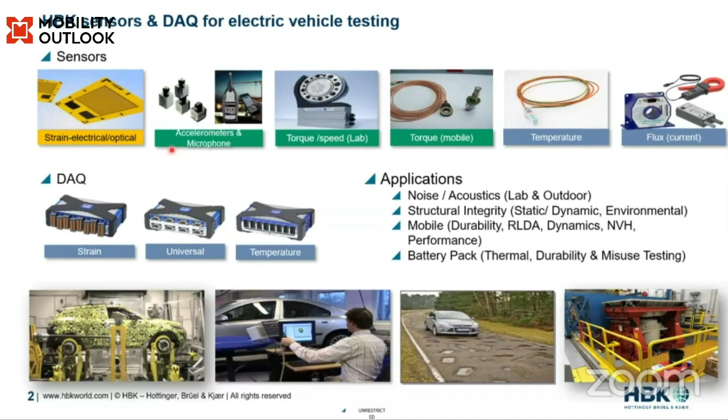Moving to the next slide. So we are taking the data to do further analysis. For that we are using the HBK sensor and data acquisition system, and after that we take that input and give it to nCode. So nCode is the software side of HBK.

It is made of two really powerful pieces of engineering software. The first one is nCode and the second is ReliaSoft. nCode is for durability and processing measured data, and ReliaSoft is for reliability analysis. Right now we are going to focus on the nCode software brand only, so we can discuss the need for reliability analysis in electrification another time.

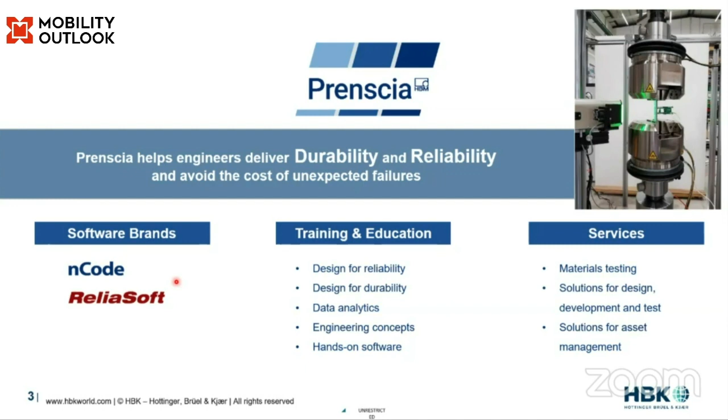So the first question that comes to mind when we buy an electric vehicle: there are two challenges in electric vehicles. How can we reduce the risk of structural failure? And second, how can we ensure that performance, range, and efficiency expectations are being met?

We know everyone is moving to electric vehicles due to petrol price hikes. The average price in India is almost 105 rupees, and the government is also giving tax concessions and some discounts on electric vehicles. But in India, no one believes easily, and no one is going to buy electric vehicles after watching reviews and videos only. They simply believe in word of mouth publicity, meaning discussing with existing customers.

And in that, the first question that comes to mind is 'kitna saal chalegi' - meaning how many years it will last long, right? So will the battery tray crack, or what if the electric vehicle starts needing too much maintenance? So these things all come under durability. And second is the performance.

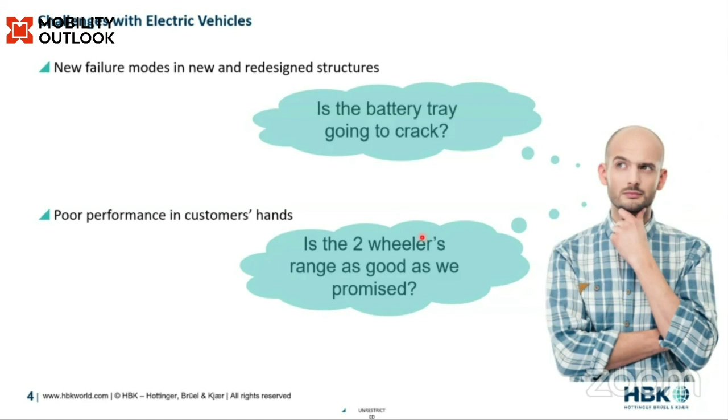So the second thing is kitna degi, meaning what will be the mileage. Is the two-wheeler range as good as promised? Suppose one says our mileage is 150 km, and I plan a trip from Pune to Mumbai, but I get stuck in between at Lonavala due to bad mileage, not the promised mileage. So currently these two issues mainly happen with electric vehicles, and both durability and performance improvement is possible in nCode.

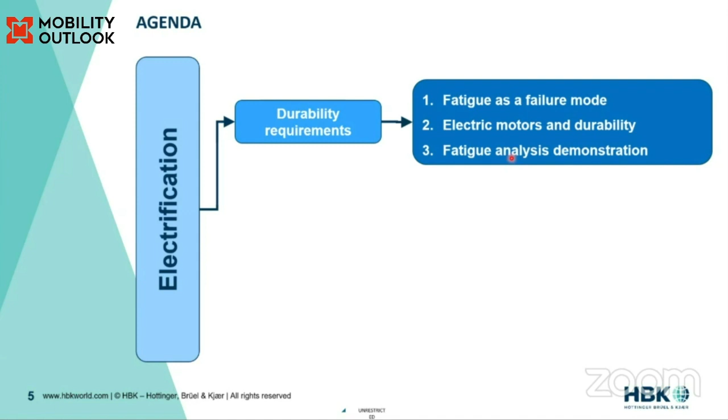So how is it possible, we'll see. First we'll focus on durability requirement. In that we'll cover fatigue as a failure mode, what is fatigue, and electric motor durability, and for that we'll see one small demo. Next agenda we'll see how to improve motor efficiency and power measurement and its analysis, and a demo for that.

So how do we know how many years it will last long? How do we know it performs as intended? It's extremely expensive to watch prototypes fail in the test lab. So we don't want to commit time and cost building prototypes until we are confident that our design will meet the requirements. We need to be able to predict and quantify performance early, before the development cycle.

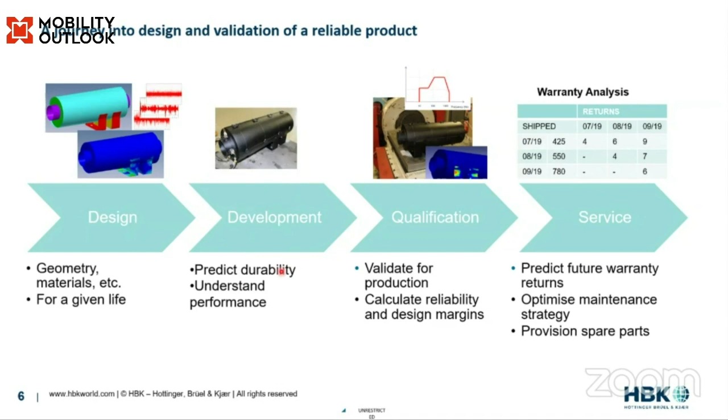So here we'll see the prediction of durability. Before going to qualification, shaker table, and test lab, we can say, okay, this is the life, and no need to go for the prototype if it is already failing, right? So how is it possible, we'll see. So we'll focus on durability now.

So this is fatigue. Fatigue is a failure mode that can happen over time, and stress cycles cause cumulative damage that ultimately can lead to structural failure and a disappointed customer again. So we need to design this again to ensure our electric vehicle is durable and will last long. In automobiles, 70 to 80% of parts fail due to damage occurred by fatigue. In simple words, fatigue is...

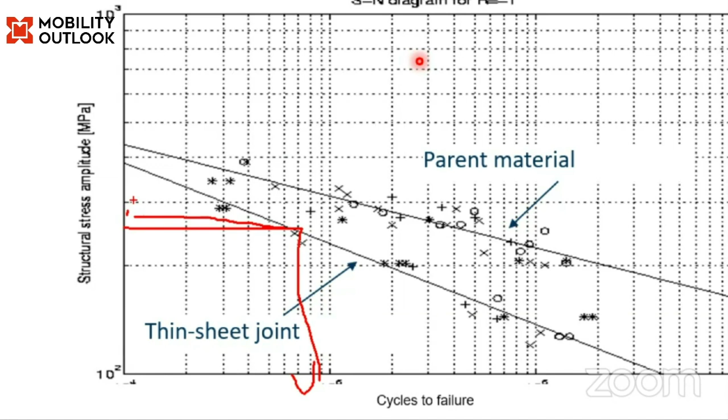Suppose there is a stress value coming from the FEM model. For that stress we can calculate the number of cycles. Now suppose we have 2 lakh kilometers and we want that vehicle to survive 2 lakh kilometers. For that cycle and for that life, we can reversely count what will be the stress value. So vice versa, we can calculate the damage and life for that particular product.

And to generate those curves, we have a test lab, a material testing lab in UK. There we can generate new curves also, SN curve, EN curve, as per your requirement. And already we have a number and variety of material databases in nCode, so for calculation we can use that.

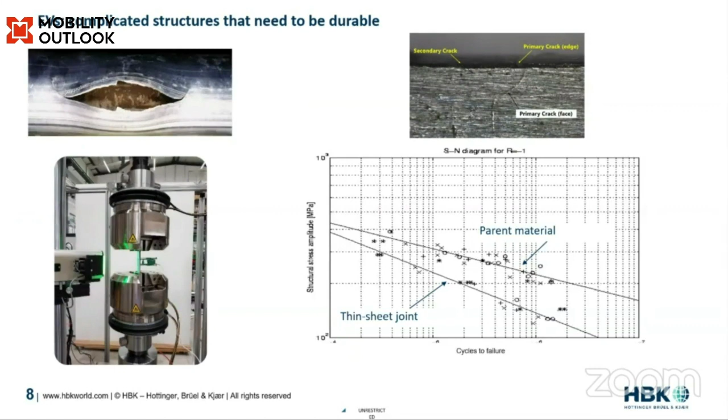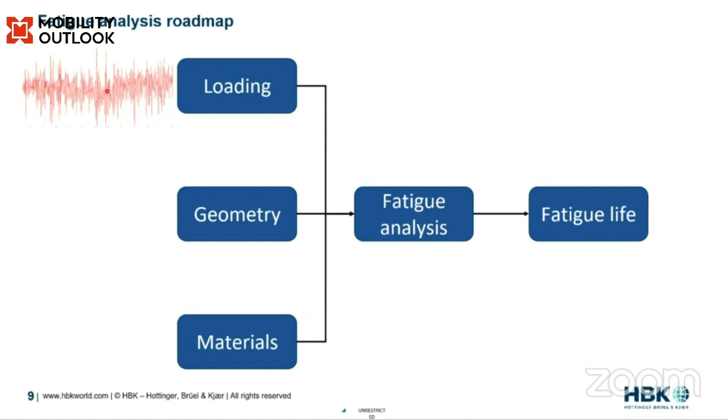So now we'll see how to calculate the life of that product. Here is the 5-box trick for fatigue analysis. This is the squiggly line - suppose your electric vehicle is moving, meaning we are creating some forces on that vehicle, and that force, that vibration, we can measure. This signal is measured by the HBK device. This is the loading, and this is the FEM model having stresses - this is the geometry, and third is the material. By giving these 3 input parameters in nCode, we are calculating the fatigue life.

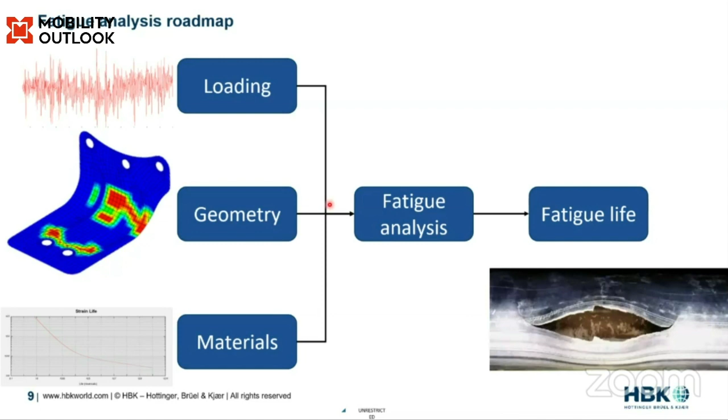So for this specific material, we have the strain and stress curves. Now we'll see how to calculate the fatigue. Now here is a small demo for that.

So kitna saal - now if you see here, kitna saal chalegi, meaning how many years it will last long. Now here are the battery tray holders. We have to check the damage and how many years it will last long. Here is the battery and these are the supporting brackets. Now we'll see one small demo for that, to calculate the life.

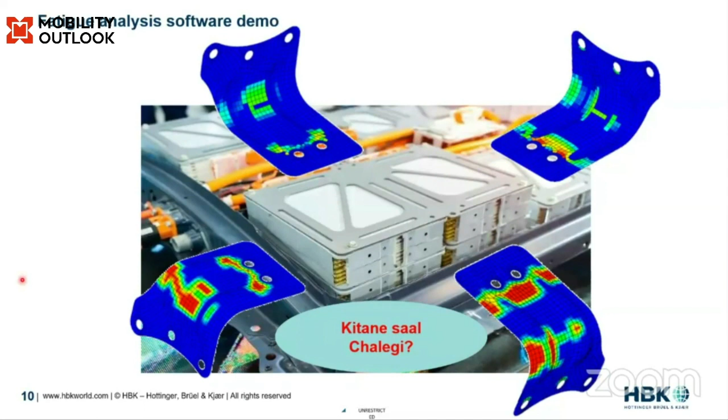Okay, so this is the user interface of the nCode. On the left side, you can see this is the GlyphWorks. It is useful for test data processing and design life, to calculate the damage and life. And here in the working window, we can import the input files.

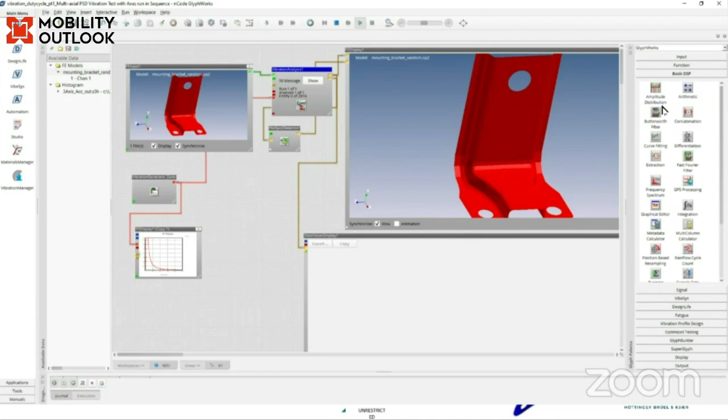On the right side, you can see the number of glyphs. A glyph is an Egyptian word, and each glyph is made to perform a specific operation and task. By connecting one glyph to another, we can create a flow as per our requirement and calculate the life. Now the run is completed, now we'll see.

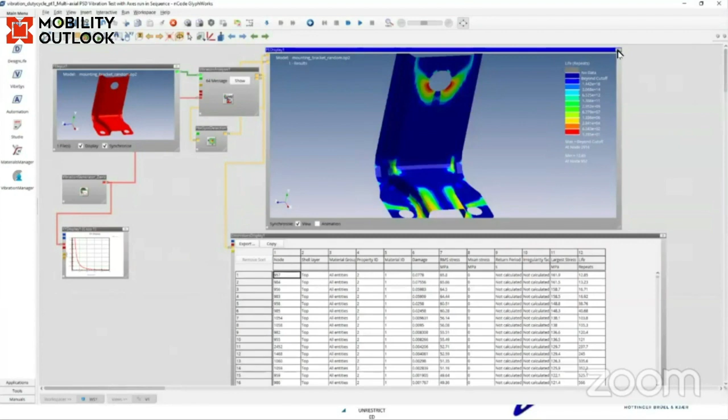Now here is the battery supporting bracket. I have made some changes in hours and years. Here you can see a hotspot is coming. At this node, the battery is failing. It's saying the minimum value is 12.8 hours, so we can say that the battery tray will fail after 13 hours, right?

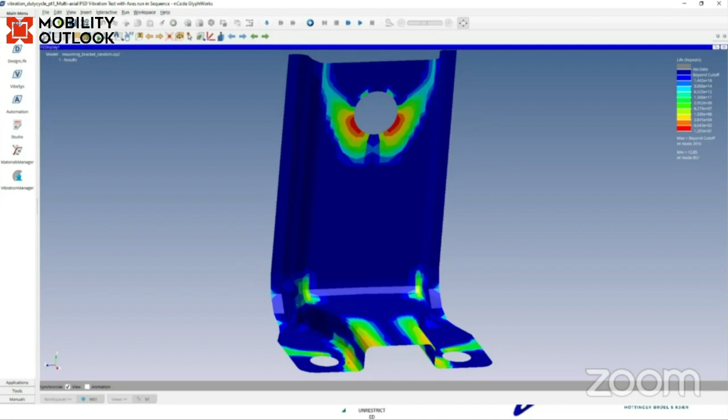So that's when we apply that much load. From here we can redesign it such that it will not fail. We don't have to go with the shaker profile or test lab if the virtual product is already failing. For that we can save money and time, and redesign it. So for durability purposes, this is very useful. This is the demo side.

Now we'll move to the next slide. This is for a depth review, meaning depth details of at what node, what will be the life, and how many repeats it will survive. Now we'll move to the next slide.

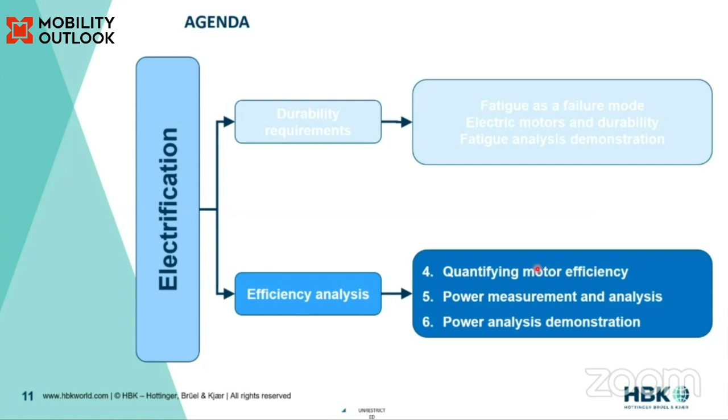So we need to maximize the efficiency, but converting power types leads to inefficiency. We can use a wide variety of motor control strategies, but which gives the best efficiency? We need to do 3 things to answer this: first, measure the power flow - DC current, voltage, and 3-phase AC output from the inverter - and finally mechanical speed and torque from the motor. From that we can calculate the efficiency throughout to quantify the performance.

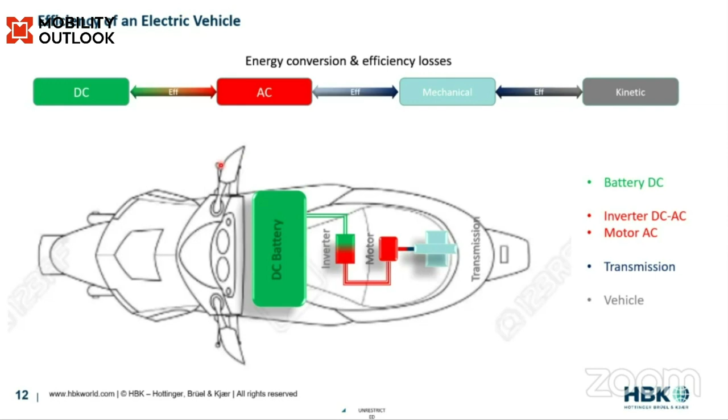So we can begin with improvement in the system for range and performance. We'll see how it's possible. For that, nCode electric glyphs is very useful. I will move to the next slide.

To measure the input and output electric current and voltage, we are using an electric e-drive system here. We are using HBK's e-drive system for electrical power testing. Tomorrow at 12:30 p.m. you can see the Mitchell Mark presentation for these details, for a depth review.

So here you can see the batteries - from there we can measure the DC current and voltage. In the inverter we are measuring the 3-phase AC current and voltage, and from the motor we can measure the torque and speed. Using our HBK hardware we can acquire that data, and nCode sits here.

By taking that data we are doing the power analysis - what is the efficiency for a specific inverter and motor - and accordingly we can improve that design. For the e-drive, it's very simple: we can record the signal at 2 million samples per second. This is the accuracy range, and simple data collection of electromechanical signals is also possible.

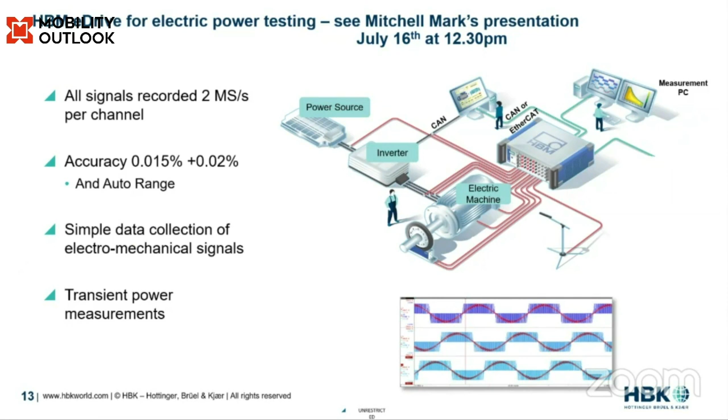Now we'll see the efficiency of an electric vehicle. How to calculate that? We simply know how to calculate power by multiplying current and voltage. But here the inverter plays a very important role. And here is the mechanical power - we can calculate that using torque into speed, right?

So DC power is easy to calculate, as is mechanical power. But AC power calculation can be hard because of the phase difference between voltage and current that causes losses. Inductors and capacitors introduce phase lag or lead, and periodically energy flow is reversed. So we need to think about active and reactive power, and we'll see what that is. Reactive power is introduced back into the system and causes losses - that's the losses. Active power is the useful power that only flows from source to load.

So we can quantify that and understand all this using the HBK tool. For easy understanding, we'll see.

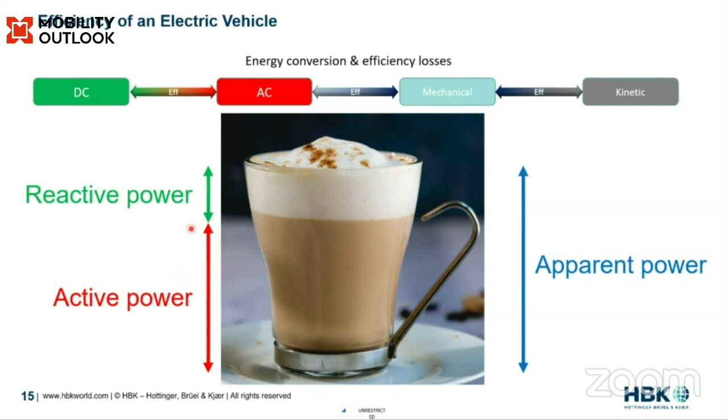For easy understanding, we'll see what is apparent power, active power and reactive power using a drink analogy. This is the apparent power, or what is coming from the DC battery, but we can consume only this much. From this coffee we can consume active power this much only, and the rest is the foam - this is the reactive power. In simple words, we can't increase the reactive into active power. So when we want to increase the efficiency of the battery, we reduce the reactive power by measuring the input output from the inverter and motor, and we calculate where our battery or motor efficiency sits. So by reducing the reactive power, we are increasing the active power - this is the efficiency for the battery and motors.

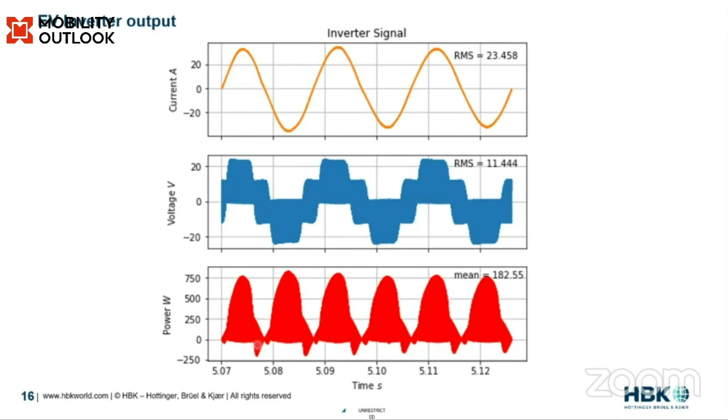In FFT, we can see the low frequency fundamental control frequency and high frequency switching harmonics from the digital inverter. Our harmonics are much larger in voltage and current, and this high frequency makes calculation more difficult. But that can be taken care of by nCode using the electric power analysis glyph.

Now, if you see here, this is the active power - the mean of voltage and current, and apparent power is the RMS of the voltage and current. Reactive power is calculated using this formula. This is the power factor.

If we assume a pure sinusoidal waveform for voltage and current, the apparent power calculation is wrong because it ignores the broad frequency content. Actually, when we measure real data, we don't see a pure sinusoidal waveform, so the calculated reactive power turns out really high. But again, for that, we use the electric power analysis glyph here.

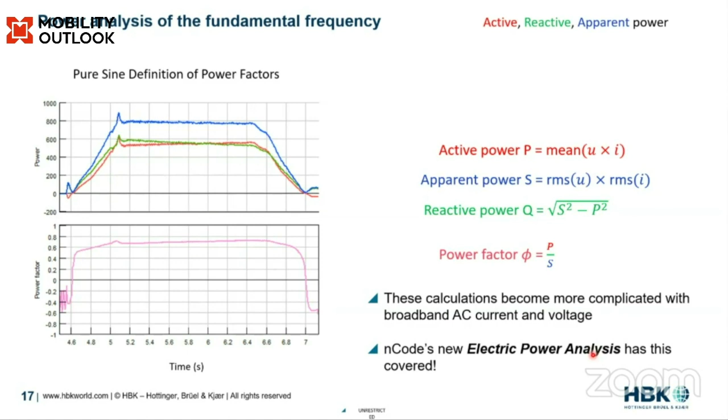We recently launched this, and in that we can find the performance and efficiency. Kitna degi means how many mileage one electric vehicle can give. So to improve the performance of the inverter, we'll see one small demo.

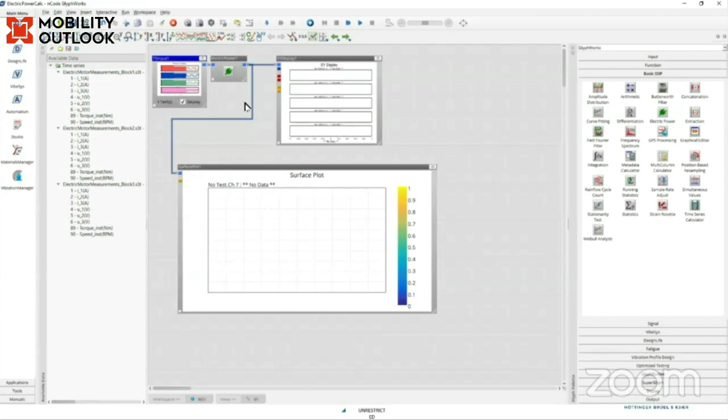Here is the input data. Now you can see we are having 3 events. In that we have taken 3 input current channels, 3 voltage channels, and 2 output channels coming from the motor. So to create a duty cycle, we dragged all 3 events and combined them here - you can see the signals here. Now to calculate the mechanical power, efficiency, power factor, we are using the electric power glyph here.

Now I am running this flow. You can see here, for this specific RPM and this specific torque, this is the efficiency. The yellow color you can see is the maximum efficiency. This data is blank because we have taken only 3 events.

When we have a number of events or data available, we can see the full graph here. So from here we can say, okay, what is the old motor and what is the efficiency for that? Now we have made some changes to the new motor, and the efficiency is good now. So for that we can create a number of strategies.

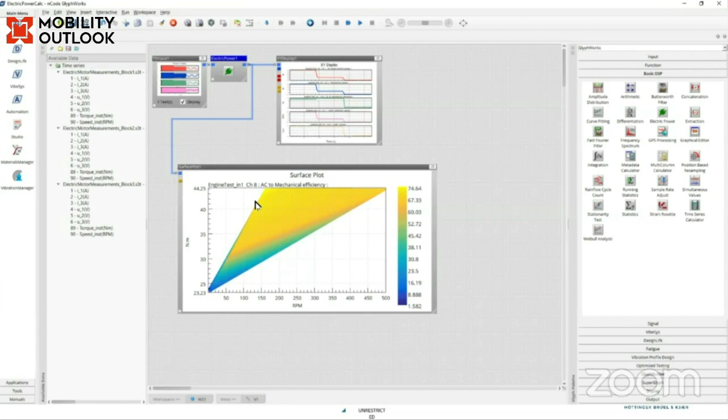Similarly, we can calculate the efficiency of the inverter also, and efficiency of the battery also. For that we simply require the current and voltage. So this is for the demo side.

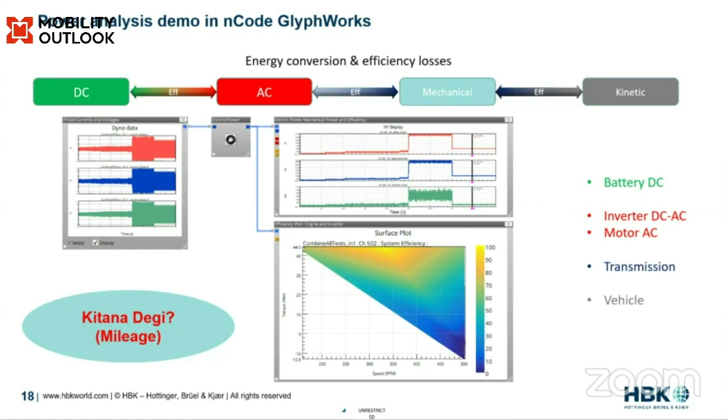Yes, this is the conclusion. So we have spoken today about the challenges in designing electric vehicles. First is whether it will be durable to last long without structural failure, and whether it will meet the customer's range and requirements. nCode software can help you with both these requirements. So we have achieved the two targets - kitna degi, the performance and durability.

So here is the last slide. Under the HBK, almost everything is possible. We are in this field for almost more than 40 years. Over the period, we evolved to give better performance and quality solutions. I'm not saying I am an expert, but definitely we are. So the only question remaining is you have to just come up with the question and the answer will be there.

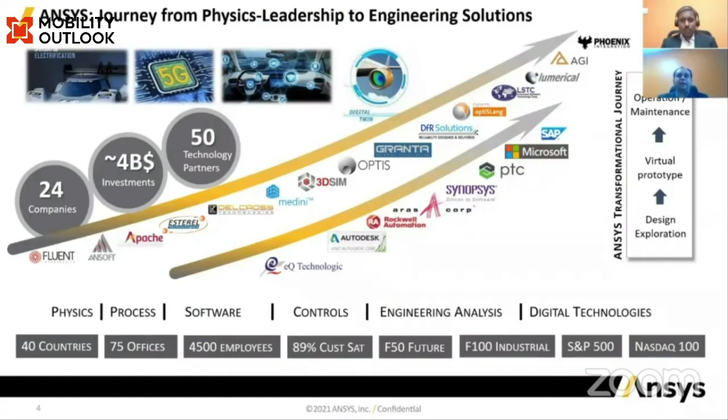So that's the ANSYS journey, and along with that, making sure the customers are able to visualize their product, how virtually it will perform in real life. We are also partnering with many of the OEMs like PTC, SAP, and so on. So ANSYS, I would say, is more of an engineering solution provider than just a point solution provider.

And next few slides, let's talk about switching to EV. We all know in EV, the pillars for EVs are the battery, the traction motors, the power electronics, and the system and software development. And in this, simulation has been used, I would say, for more than a decade.

ANSYS itself has a history of being in the EV simulation field for more than a decade. I mean, I would say in the early 2000s also, people were designing EV motors using ANSYS.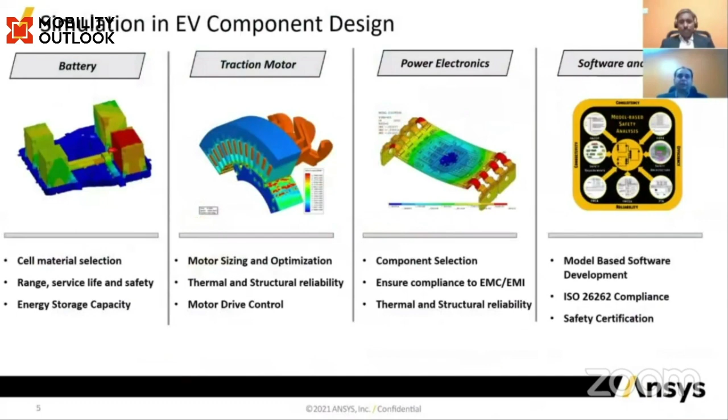Now, we'll be talking about all these building pillars, but the most interesting part we wanted to highlight in this presentation is the development V-cycle, which we normally see. On the right-hand side, once you have finalized a component, you would like to make sure this component, while testing, performs verification and validation using MIL, HIL, and SIL. And then take it to a system level with similar MIL, HIL, and SIL.

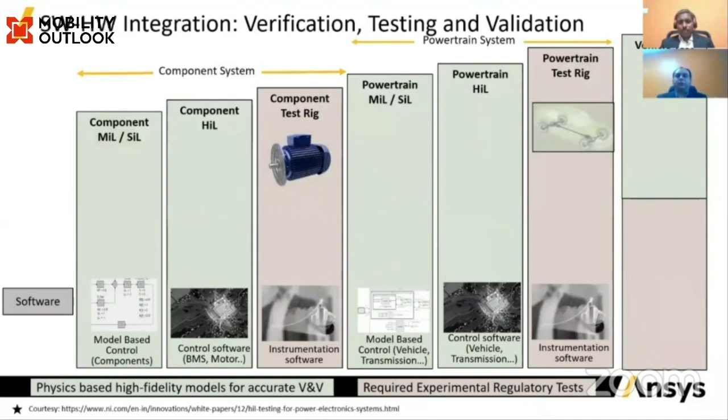Here, ideally, you do this using physical prototypes. And what we have also been seeing is that the hardware and software teams are isolated from one another. So if you're looking for software validation also, let's say MIL, SIL, HIL kind of thing, you either go with a physical prototype or you go with a low fidelity model to validate your software.

A similar thing happens on the hardware side also. Here also, either you go with a physical prototype or you go with low fidelity models.

So that's where ANSYS proposes a solution where, instead of going with low fidelity models, you can start using high fidelity models. These high fidelity models come from your simulations. So you don't have to do an extra step. All you have to do is use the simulation for designing your components.

And once the component design is done, you can export that high fidelity model, either in the form of ROM or FMU or so on. And then that can be used in conjunction with your software for SIL, or using it for MIL, HIL kind of thing. So that's on the component level, but each of these FMUs or ROMs which are coming from the simulation can also be integrated into your system level simulations.

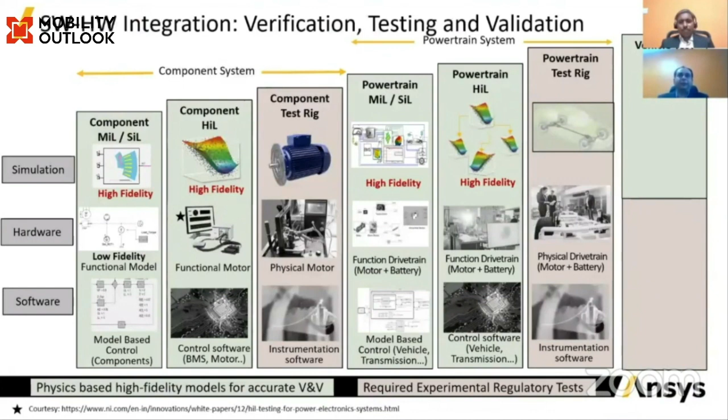And that's what you can see here for the powertrain MIL, HIL, SIL. What we are showing here is that you can use these high fidelity models for validating your system level things, and also for the vehicle level test. Instead of doing physical prototypes and doing your vehicle level test or road test, you can go ahead and also perform that virtually, so that you can reduce the number of physical prototypes and tests which you perform.

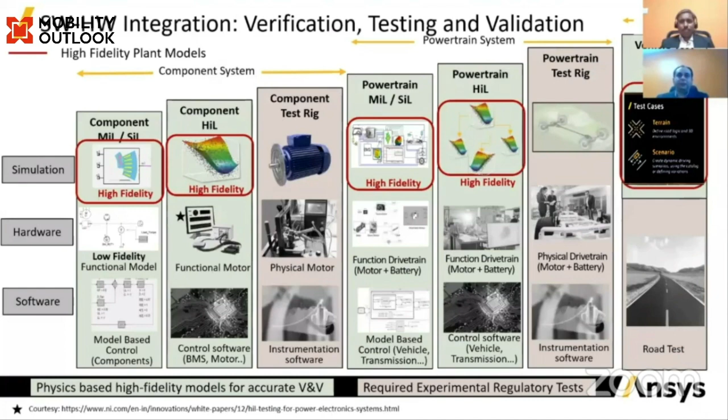You can accelerate your physical prototypes, and so on, and get better insight. So that's one thing. The second thing is virtual vehicle drive validation. Here again, instead of doing physical drive validation, where you may have n number of drive cycles and different test scenarios to be performed, can this even be done virtually? So this is something we'll be seeing in the next couple of slides. So let's get to our first topic, which is on the battery subsystem validation.

This is something we do day in, day out, where you perform a CAE analysis. You start with the electrode level analysis, a particle level analysis, and visualize how your lithium ion is going to be depleted. This is done by chemical engineers, then taken to thermal and structural reliability analysis by the thermal engineer, making sure temperatures are within limit, there's no thermal or mechanical abuse, and no fire, or if there is a fire, how you can mitigate that. Then it's taken further to the electrical engineer, making sure there are no EMI/EMC issues in the system, and finally once your battery is designed, it needs a BMS, making sure it keeps monitoring data like temperature, voltage, current, and so on.

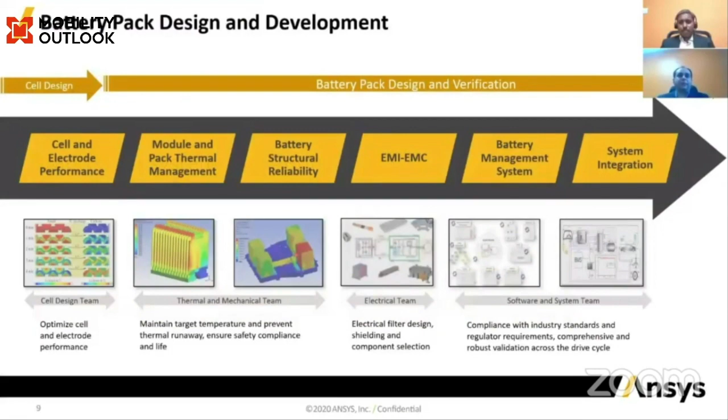While it's measuring, it's also taking into account some algorithm, some logic. Let's say if the temperatures are high, increase the flow rate. If its SOC is 0.9, reduce the charging, and so on. So all those logics are going behind your BMS part. This is something where Ansys is doing, and it helps.

Whereas compared to thermal models or CFD models, which take a couple of hours for a given drive cycle, you're converting your heavy 3D models to lightweight ROMs, and it's as accurate as your CFD models because it's derived from them. Now, instead of using a low fidelity model for your BMS validation, you can use this high fidelity model, and it's already available. With this step, you're bridging the gap between a simulation engineer and a CAE or hardware engineer. Now the software engineer can go back, fine tune his parameters, like the flow rate, or change the charging and discharging algorithms, because he now has more confidence in his design compared to using a low fidelity model.

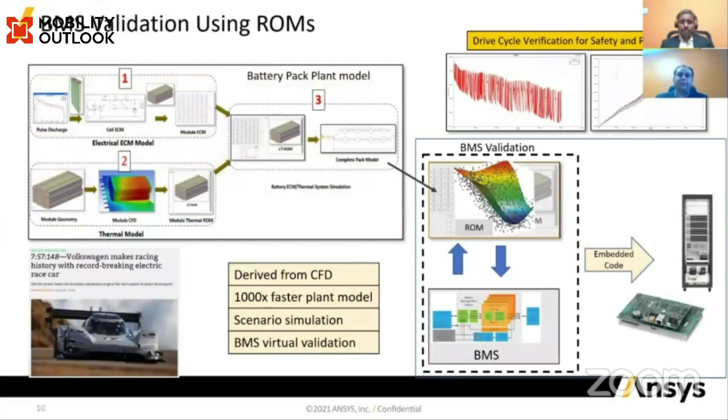So with this, I will hand it over to my colleague, Tushar Sambharan, who will be talking more on the motor subsystem validation, AI, ML, vehicle drive validations, and so on. Thank you, Ankit, for the details provided, setting up the context and covering the battery part.

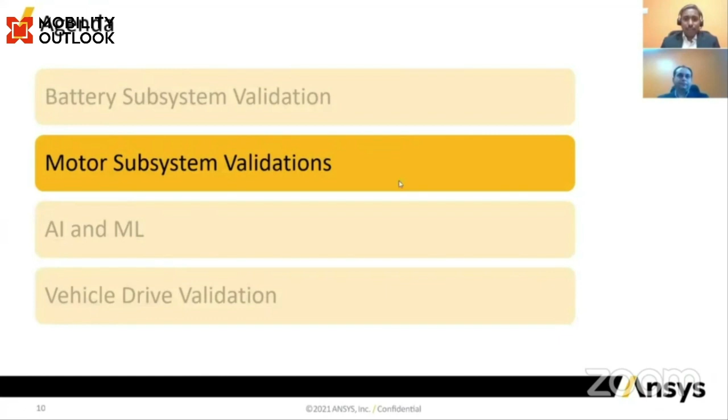Now, coming to the motor, it's a very important part of the overall electric drivetrain, basically the engine replacement. You need to make sure whatever motor subsystem you design is efficient, not only in terms of performance, but efficient in terms of operation as well. That's very important for validation, to make sure that whatever requirements you lay down for motor performance and overall operation are getting met. That's what we'll talk about in the next few slides, how simulation helps achieve those goals of motor validation, both from performance and drivability.

If you typically look at the motor design workflow itself, the motor is a component whose whole design life cycle can be maintained in a virtual environment with very high confidence. There are many practices in the industry where virtual validations or virtual design environments for motors have been able to cut down their overall design cycle. Typically, when designing a motor, you start with specifications like torque demand, speed demand, power demand, and so on, and then you have constraints like sizing constraint, current constraint, thermal constraint, so on and so forth.

Now you take these requirements and constraints and you start by putting together a design, typically starting with a concept level design. You use something much more user friendly and faster to do a concept level sizing of the motor. This includes electromagnetic sizing, coming up with the overall design like slots, and then thermal sizing where you decide what kind of cooling system you need, how the heat exchanger should look, and so forth.

Once you do the sizing, you validate that across the full torque speed envelope, because it's a traction motor and it's supposed to operate across the envelope. Then you do a lot of optimization at this stage itself, because you are in the early stage of the design. You need to make sure everything is frozen and you don't leave too much for the later stage. That's what front loading is in a sense, right? So you optimize and make sure you come up with the right design in the initial stage.

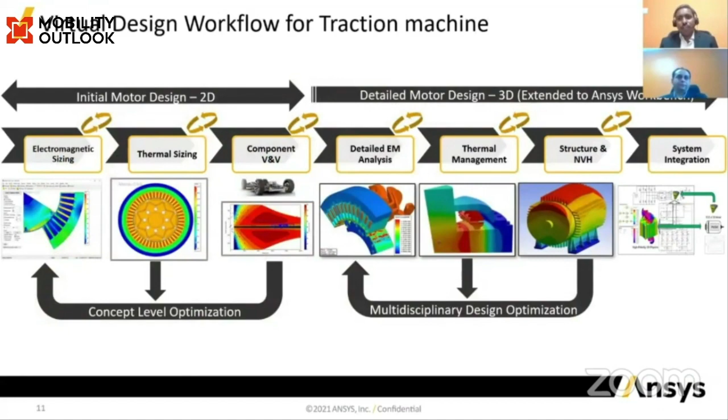For example, the motor is not alone, right? It has to work with your power electronics, it has to work with the motor controller. So the question is, how do I make sure whatever motor I've designed is controllable? And how do I ensure whatever controller I've designed is working correctly with the motor I've designed? Because they both need to meet together in a synchronous way. That's where virtual validation for the motor subsystem comes into picture, where we talk about generating a high fidelity model from your simulation, from your FE data, which you're generating through your design process, and create a high fidelity representation of that motor model and push it for your motor controller validation.

Now typically, if you look at the industry, many people still do validations using a low fidelity abstract model with constant parameters, which may be okay for an industrial motor. But if you look at an electric vehicle, the operation envelope is so huge that the characteristics of the motor significantly vary. So when you compare a controller working with the motor with constant parameters versus the high fidelity model, you'll see significant deviation in overall performance. The response time, the overshoots, the delay - those parameters are significantly different compared to what you realize in real life when you use a library based model.

That pushes the need for having a high fidelity representation, so that whatever controller you tune needs very little adjustment when it goes into the physical product. So you don't have to do too many iterations back and forth from the test bench to your lab to your design environment, and you're able to sign off with much less effort.

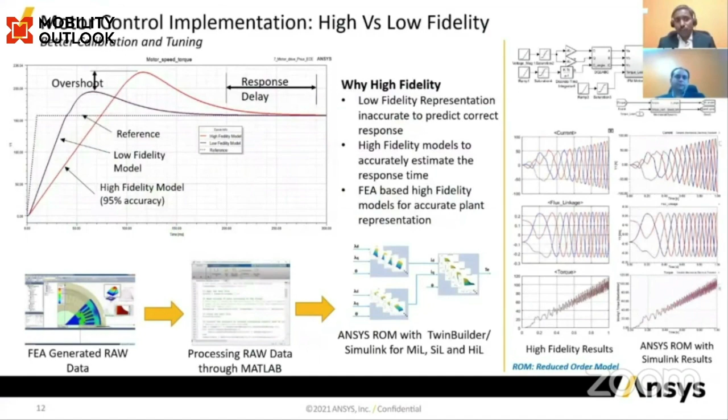Here we have shown the example using MATLAB Simulink, but it could be any other simulation environment where you may be modeling or simulating the controls. So there's a lot of questions on the controller level as well.

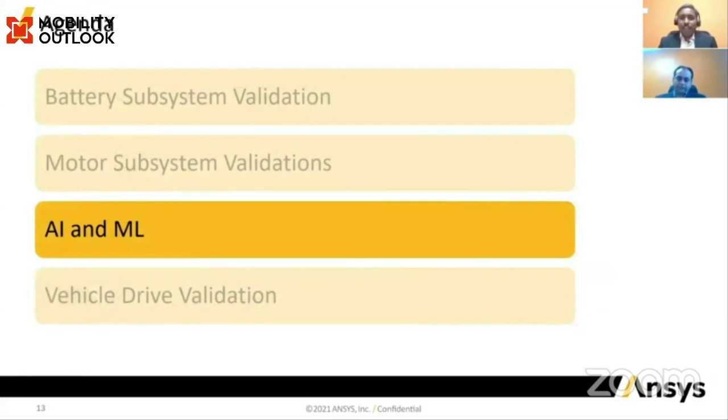Coming to AI and ML, I think this is going to be a game changer going forward, because the techniques developed through machine learning are going to come together with simulation and be very powerful in making sure that real life situations can be mimicked and brought into the virtual environment. There are many variabilities in real life compared to the virtual environment, and those real life situations can be captured through ML and complement the simulation. I'm going to show you a couple of examples related to EV for use of AI ML techniques.

The first one is the torque speed characterization of the traction motor. If you are a motor design engineer, you know how critical it is to do torque speed characterization accurately. But when you go for a very high fidelity simulation, something like 3D, it takes significantly long time because it's a huge design table that needs to be solved to characterize the motor. And to solve such a huge design table, you need quite a big computational power in your simulation environment.

But when you couple this with something called fusion modeling, where you use a very low fidelity simulation combined with a few high fidelity simulation data points, and then apply machine learning techniques, you can use a very small amount of data from a 3D FEA simulation and a very large amount of data from something like an analytical solution, and combine them in an economic mix to achieve results as accurate as 3D FEA. You can see the comparison I've laid down, the 3D FEA simulations compared with the fusion model—they are quite close to the 3D FEA results.

The overall process gives you more than a 10x speed up in a single iteration. Now, if you put together the number of iterations that the motor goes through, it could be a multiple-fold increase in the speed up you can achieve in terms of simulation.

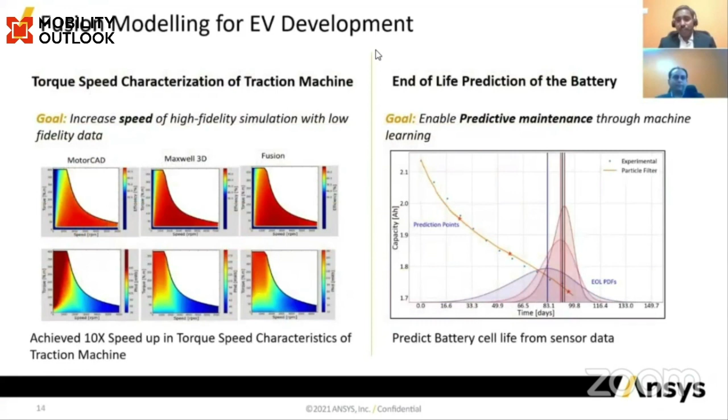So you need to implement something like a predictive model, which takes statistical considerations into the calculation and is able to predict the remaining useful life of the battery, accounting for overall variabilities as well as changes in operating conditions. We have implemented these kinds of techniques which can work together with the simulation environment, and this could actually work with the physical asset as well, where you can predict the remaining useful life of the battery using these techniques.

Coming to the last section, vehicle validation. We talked about subsystem level validations for both the battery and motor, but these subsystems also need to come together on a vehicle. When you put it on a vehicle and do a drive cycle, many times you realize that the full system, when you do a drive test, gives significantly different performance than expected, because the driving conditions are significantly different. The demand you expected in your design phase may not be the same as in a real drive, so those variabilities don't get accounted for many times.

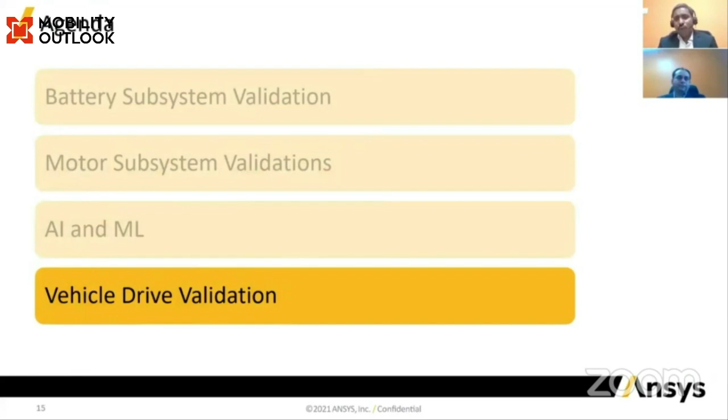On top of that, if you look at vehicle performance, many times when a customer takes a vehicle and drives it, the range is completely different than what is certified, because certification is based on certain conditions. Many times you want to account for all these real life scenarios, and that's where the vehicle drive test becomes very important.

So what we are trying to do here in the vehicle drive test is basically combine our high fidelity models developed through simulation. You have done a CFD simulation for the battery, an FEA simulation for the motor, and probably have other components as well, brought through simulation or experimental results. Then you combine them together in a 1D simulation environment and create a plant model.

That becomes the representation of your vehicle. Then you have to connect it with the environment, the surrounding, because the surrounding plays a very important role in how the vehicle will perform in real life. You need to get into the details of how the vehicle road profile will change, what kind of inclinations you will come across, how is the turning, what is the need of braking that may come across. These scenarios need to be taken into account together with the plant, so you can be more confident about what kind of range you can expect from the vehicle, what temperatures the battery may encounter, how the SOC is getting balanced. You can even bring in your BMS and validate whether the BMS functioning is correct. There's a lot of scope to expand this and go beyond traditional validations, closer to real life conditions.

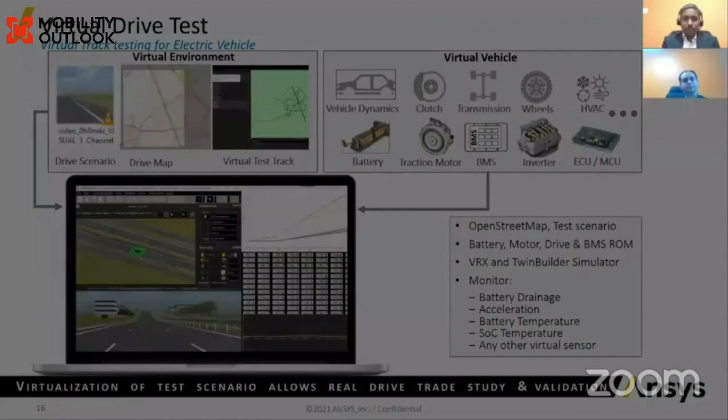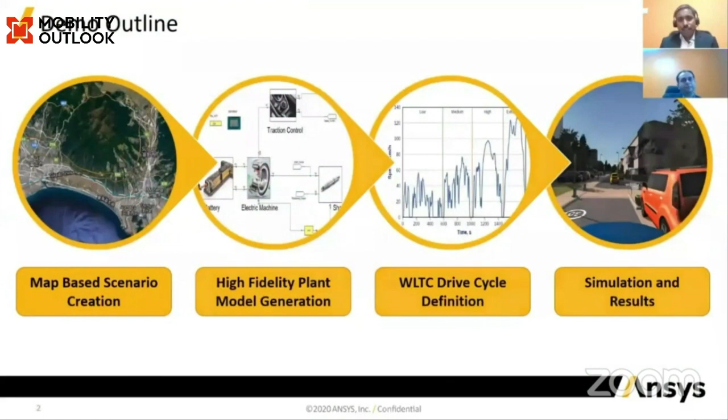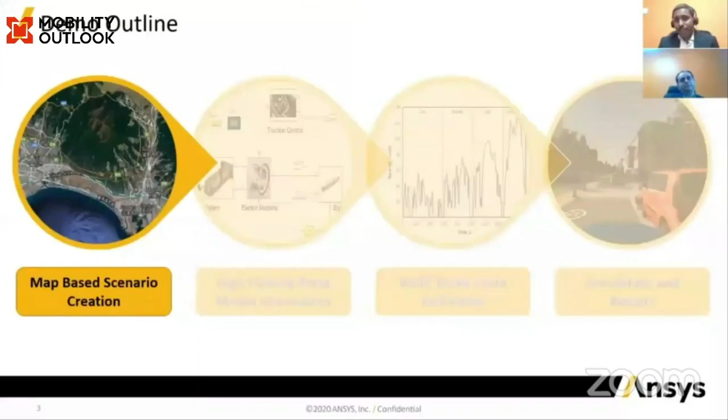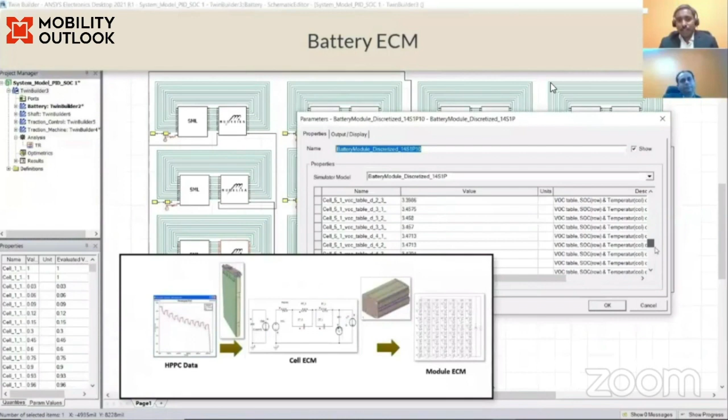So the goal is to estimate the range of the vehicle, and there are multiple steps in it. What we are trying to do is create a scenario out of real life map data. That scenario we feed into a software and create a real environment used for the driving. Similarly, a very high fidelity plant model of the vehicle has been put together. There's a detailed model of the battery, which includes the 2RC model, including temperature dependent RC parameters. We also have a reduced order model extracted from CFD simulations, which captures the thermal behavior of the battery.

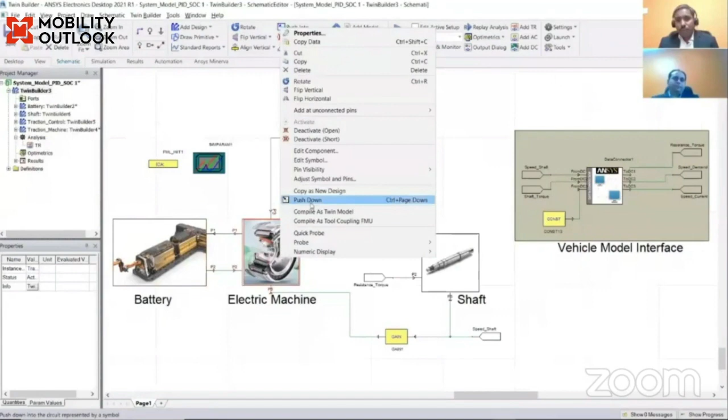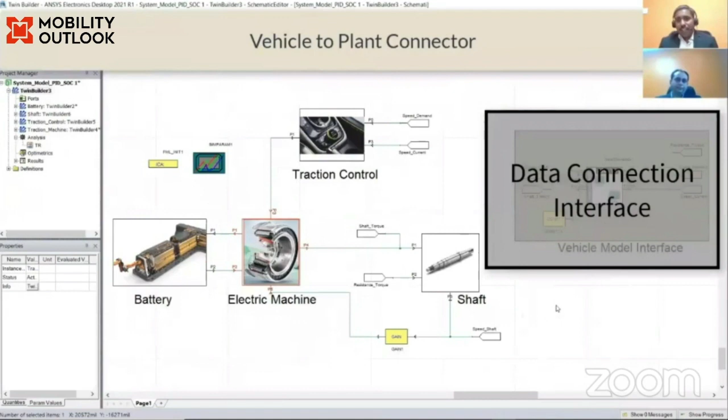Now, the same applies for the motor as well. The motor reduced order model is also generated from motor FEA analysis, and that has been put into the system environment. There's a connection to the vehicle model where the rest of the driveline components are modeled. Then we define a drive cycle here - the WLTC drive cycle for class 2 vehicles is getting defined. You could also do it with traffic. Right now we are doing it just based on the drive cycle, but you could include real traffic conditions.

Finally, we are doing a drive test onto the virtual environment. As you can see, the vehicle will accelerate and decelerate based on the demand coming from the drive cycle. Based on that, the battery will provide energy to the motor and get discharged. This is a long drive, so we're showing it fast forward - you're basically seeing a full drive cycle being conducted here. Over the full drive cycle, you're monitoring the SOC, the temperature, and the overall range of the vehicle. So that's all I had from my side.

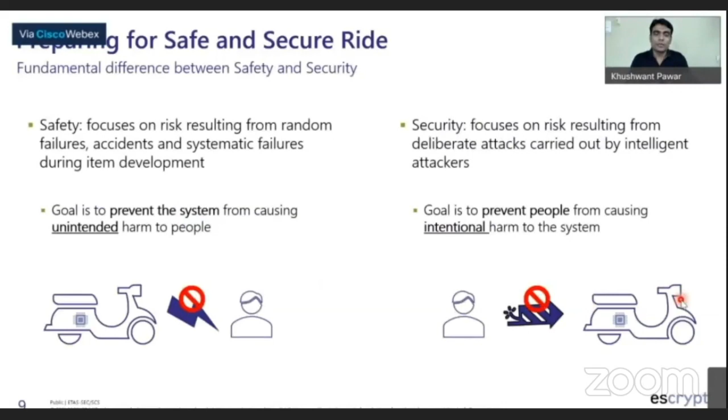Where do you start? Obviously, if you want to implement safety and security, you would want to figure out, talk to the experts, or maybe look at some of the standards which are available. So there is this functional safety standard, ISO 26262, and the automotive cybersecurity standard, which is an international standard as of now. It just needs to be ratified, so it is the de facto standard for cybersecurity.

We just thought of simplifying this to some extent. In a sense, the development life cycle is going to start at some point after the feature definition is done. Then an item or component definition analysis, then some concepts and measures would come up. The design will take place, and implementation, V&V, release. This is a typical development cycle.

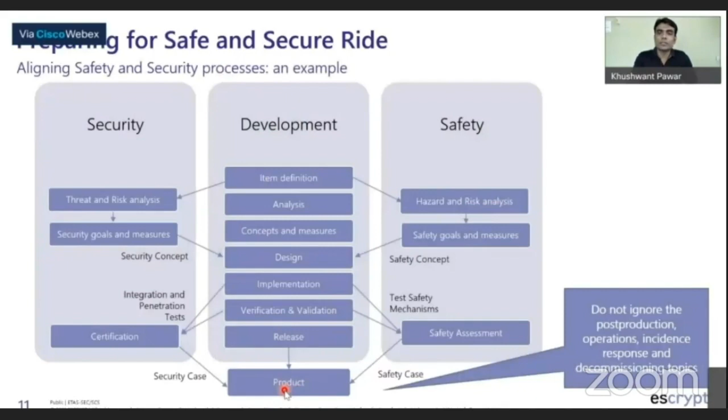Not to forget that there are several post-production activities which will come up. So development of a secure product usually stops at the product release, SOP. Now, there will be post-SOP activities, a lot of them, especially in case of security, where incident response or key management or ensuring the safe and secure updates are supported well throughout the life cycle of the vehicle. So those activities are also considered when you're considering the security and safety topics.

However, easy said than done. Safety and security have a lot of conflicts when actual implementation begins. As it is, the objectives are slightly different inside out and outside in views. So a good conflict example would be fault tolerance mechanisms from functional safety perspective. Usually would bring a system into a safe mode of operation in a certain circumstances. So these kind of mechanisms are triggered in a certain time interval. So if there is certain kind of behavior noticed within X milliseconds, the fault tolerant mechanism will be triggered, and then the device will be in a safe mode.

Now, an attacker can, if security is not very well implemented, trigger this kind of safe mode operation, which will thereby render a compromised safety integrity, right? So what would you do? You would implement security mechanisms like encryption or authentication especially, because you would want to ensure that no attacker input is considered by the rest of the system. So the system gets input only from authentic sources like another function or another ECU for that matter.

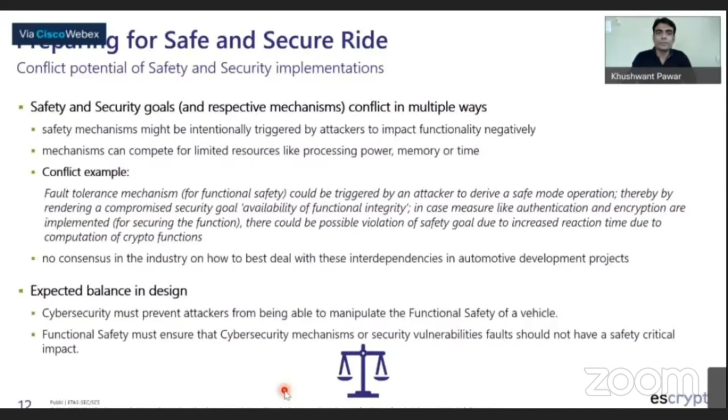Next, I would want to talk about aligning a lot of new and existing disciplines to speed up. If your target is to reach a safe and secure ride, then you already have inbuilt quality processes, right? At least secure coding, coding quality guidelines would be followed. Just try to upgrade it to maybe secure coding guidelines as well. If you're already implementing advanced features or looking at AutoSAR for that matter, just try and see what all can be used to create the safety and security artifacts. Safety and security standards are already there. So aligning, seeing through all of them may lead to a faster or smarter path to the objective.

And just to take an example on AutoSAR, it already has inbuilt mechanisms to address some security topics, especially mentioned in the WP29, which is a regulatory topic that has come up very recently in Europe, Japan, and Korea. So CryptoStack is already well defined. There is a secure SecOC, secure communication implementation guideline available. Secure logging diagnostics is already present. So the AutoSAR standard is actually giving a lot of intrusion detection mechanisms that are already inbuilt.

They can be addressed with minimum effort on reinventing the wheel. So take this, try to leverage the existing technologies or existing standards and then implement. That is a way of fast tracking the development of a safe and secure ride.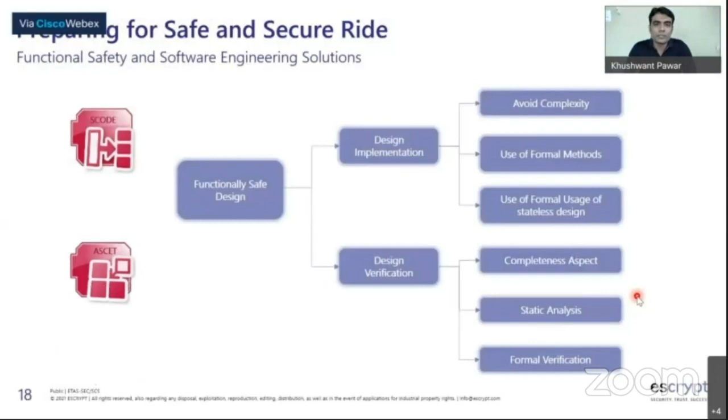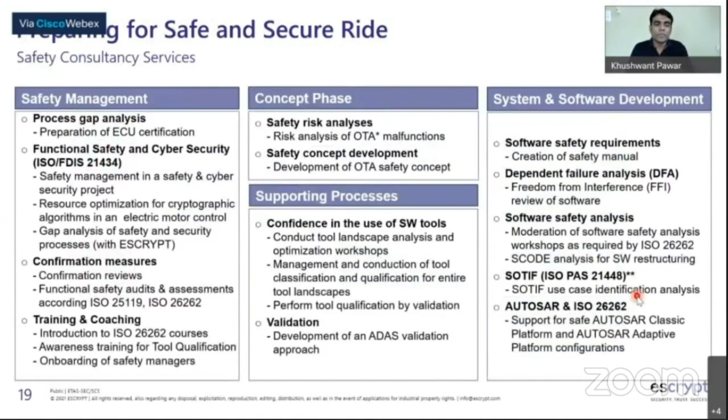On functional safety itself, we offer a huge set of services for consultancy in terms of safety management, right from process gap analysis to aligning safety and security standard requirements, gap analysis, confirmation measures, training, coaching, hand-holding, creating safety risk analysis, and safety concept development, especially for advanced topics like over-the-air updates.

We have been promoting it for quite some time. Some of the supporting processes, like how to build confidence in some sort of software tools. Earlier, I mentioned that ASCET and SCODE are qualified tools, functional safety qualified tools. This kind of confidence can be built for your tool chain, whatever you might be using.

And then system and software development services. Anything that is applicable, be it SOTIF, that is ISO PAS 21448, the safety of the intended functionality topic, or be it AUTOSAR in general, ISO 26262. We have been supporting a lot of customers.

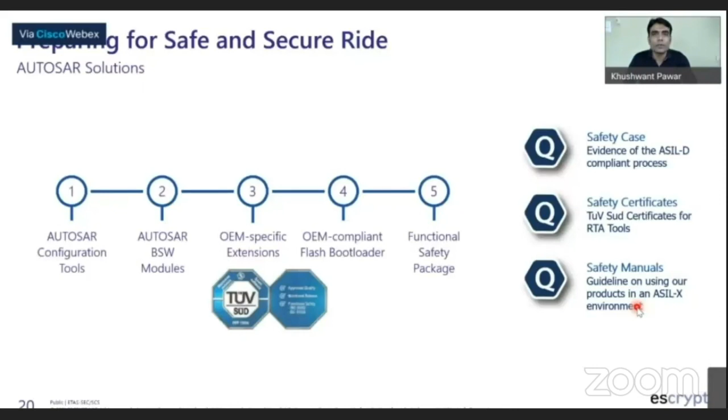Last but not the least, there are onboard software that we already have that are safety compliant and ASIL-D certified also. So just like the crypto software stacks, there is also an AUTOSAR based software stack. There is AUTOSAR OS. There are flash bootloaders, non-AUTOSAR OS. All of this with a great amount of documentation and certifications available for safety compliance.

Quick wrap up. So where would you ideally start? You would want to introspect. Is safe and secure ride your objective?

So if your organization is gearing up for safe and secure ride, try to connect with internal stakeholders, identify the need of the organization, how much safety and security is needed for the intended functionality or the intended subsystem or the target of evaluation, or entire vehicle for that matter.

Align with subject matter experts to identify impact on yourself, your department. Of course, you can talk to experts. We at ESCRYPT have been attempting to understand this complexity, but we can assure you that this is an ever increasing complexity. So it's a continuous learning process for us, working with multiple OEMs,

helping them achieve safety and security compliance, supporting their tier ones in achieving the intended objective from the gaps to the target states. Then define your department's role.

It could be anything, setting up an engineering process or aligning safety and security process, or creating safety artifacts, safety concept, or validating security through penetration tests, or implementing a vehicle security operations center.

Identify your department's role, then take the next step, because at the top in your organization there will be a lot of discussion that would be going on that probably you're not aware of.